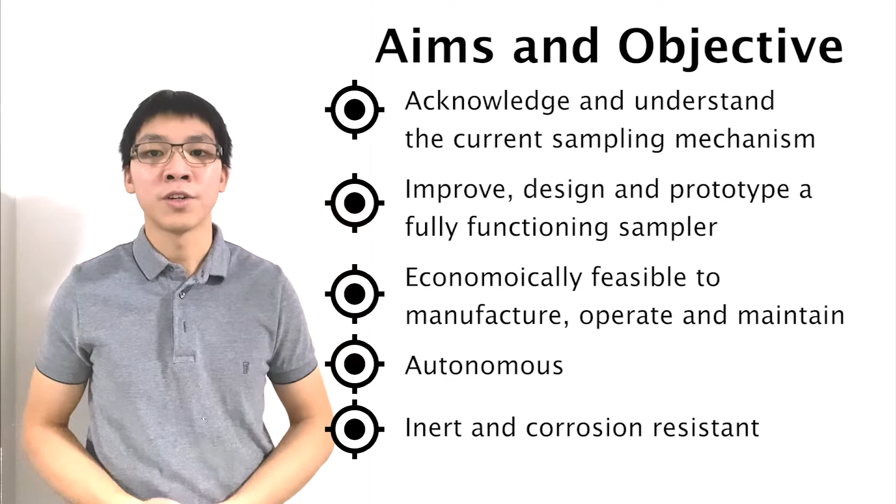Then improve, design and prototype a better version that is both autonomous and economically feasible to be deployed to a developing country. The system has to be simple, robust and reliable with the use of proper material that will not leach or react with chemical compositions or analytes found in water. In order to achieve this, a design flowchart was made. This acts as a systematic guide for the entire project while being able to identify key design phases.

The selection process undergoes the same methodological process in which the best and most suited design will be selected. The selection process includes the use of quality function deployment, Pugh matrix, system comparison, and cost comparison. Cost is particularly important in this design project as the system will be required to be deployed to a developing country. As such, a simple cost comparison was made for the different designs based on its manufacturing cost, operating cost, maintenance costs, and replacement costs.

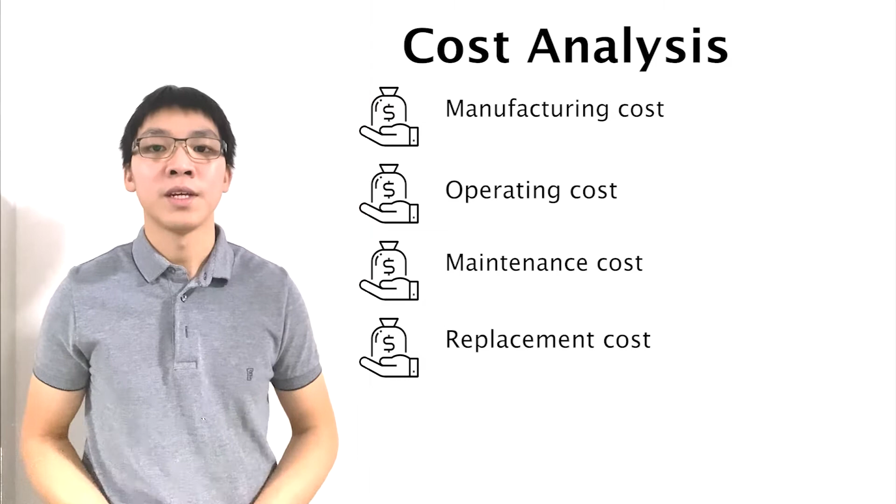The operating cost takes into account the local labor cost for the entire duration of sampling. Adding to that, a 5-year cost analysis was also done to compare its deployment feasibility. A total of 3 design concepts were made. The first design, as seen on the left, is an improved version of the reusable double check valve bailer, and a second design on the right uses a pump.

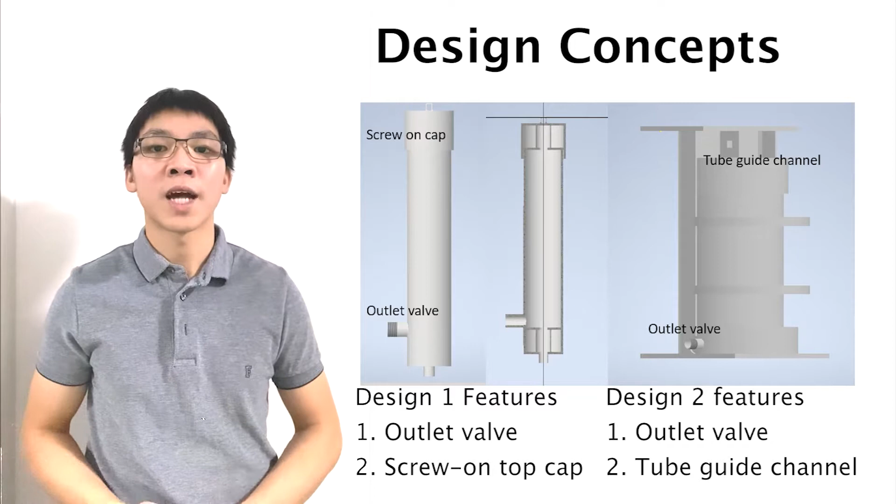Design 1 also has a screw-on top cap that allows the bottle to be accessed easily for cleaning and decontamination. Design 2, on the other hand, features a tube guide channel that acts as a support and guide for the inlet tube to feed water directly into the inlet of the bottle without coming in contact with it.

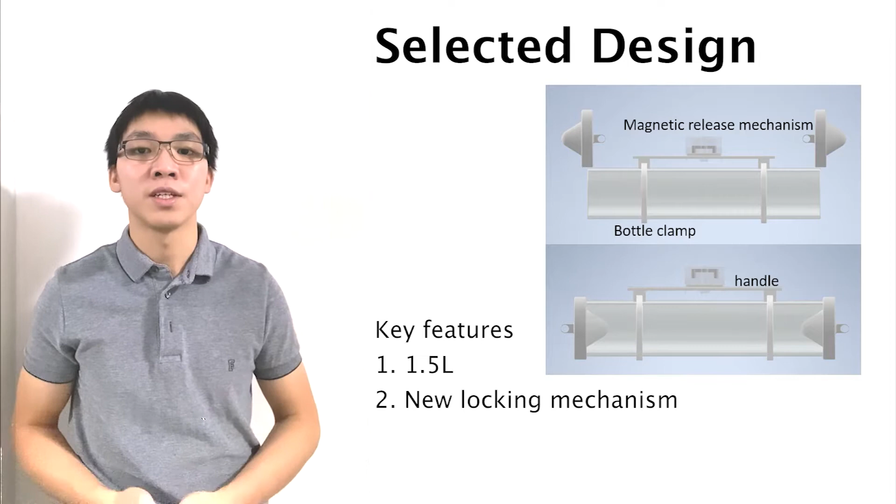The final and selected design is an improved version of the Van Dorn bottle with 1.5 litre capacity. This design features a newly designed closing mechanism that uses a magnet instead of the traditional messenger. This ensures that the triggering of the locking pin is almost certain every single time regardless of how deep the sampling is. Besides, it also has a detachable bottle clamp that allows different bottles to be used for different sampling conditions

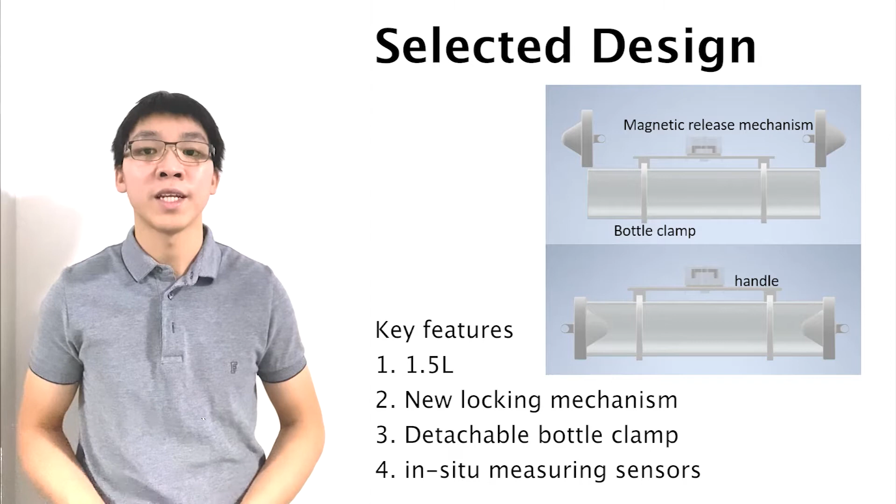and environments. The free space beneath the handle can be used to attach in situ measuring sensors. This includes pressure and temperature sensors. This is a particularly important feature for sampling in the Yamuna River as the pressure sensor will be able to distinguish between the foam and water layer. On top of that, the use of these in situ measuring sensors allows for different stratified layers to be identified. Here's a short animation of how the bottle will work.

Several tests were conducted on the final prototype. This includes a sampling volume test and a leak test. The purpose of the sampling volume test is to understand the sampling limit of the bottle when being submerged in water. It is particularly important that the bottle is filled completely with very minimal gas pockets as they tend to expand when being retrieved. This will affect the sample content.

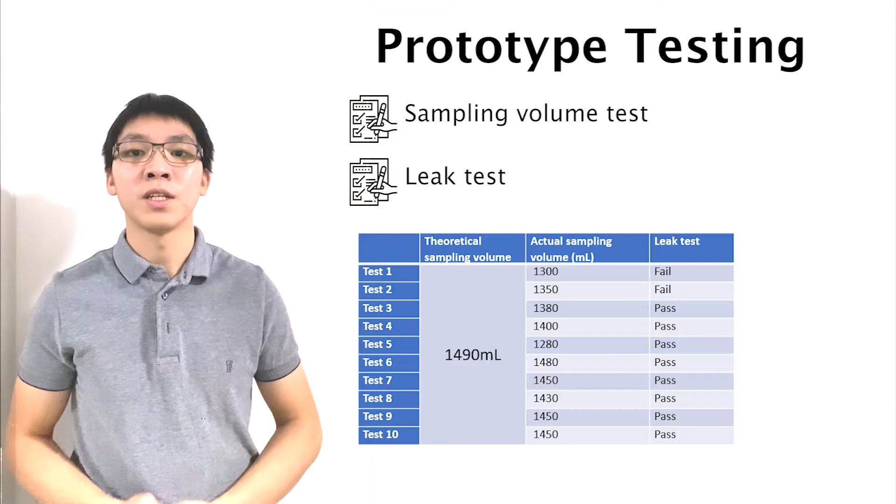The purpose of the leak test is to ensure that the bottle provides a relatively tight seal when sampling. As summarized here, the first 2 leak tests failed because of the latex tubing in the middle of the bottle. Through this test, the process of prototyping can be said to be a success where the bottle is able to perform its necessary tasks.

However, further testing is still required where the bottle will be put under adverse weather and water conditions to allow the operator to fully understand the capabilities of this design. Besides, several improvements can also be made on off-the-shelf components to increase its operational lifetime, to minimize replacement and maintenance. Before I end, how is this autonomous and how will it move?

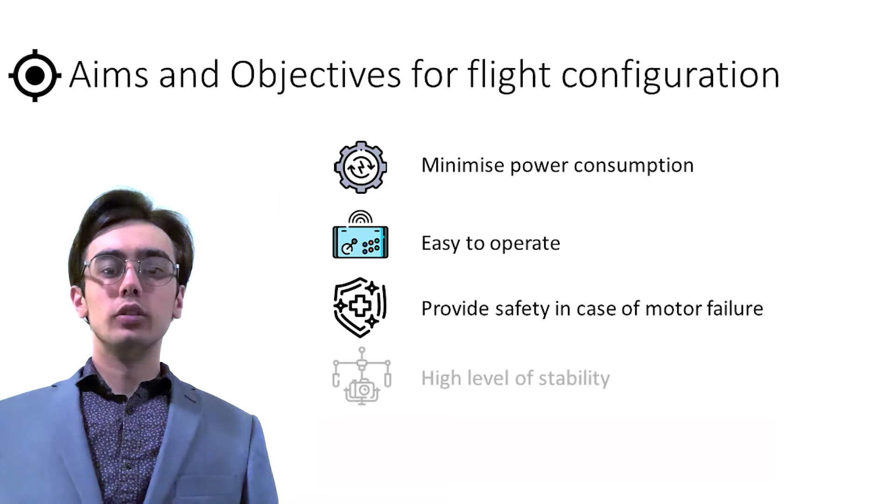It is clear to modify our drone to have a water sampling device attached underneath. It would need to accommodate a moderate payload capacity and possess a high level of stability to facilitate the sampling of water. The drone's flight system would also need to be carefully implemented to allow for a medium flight time, as well as include several safety features to protect the drone and drone operators.

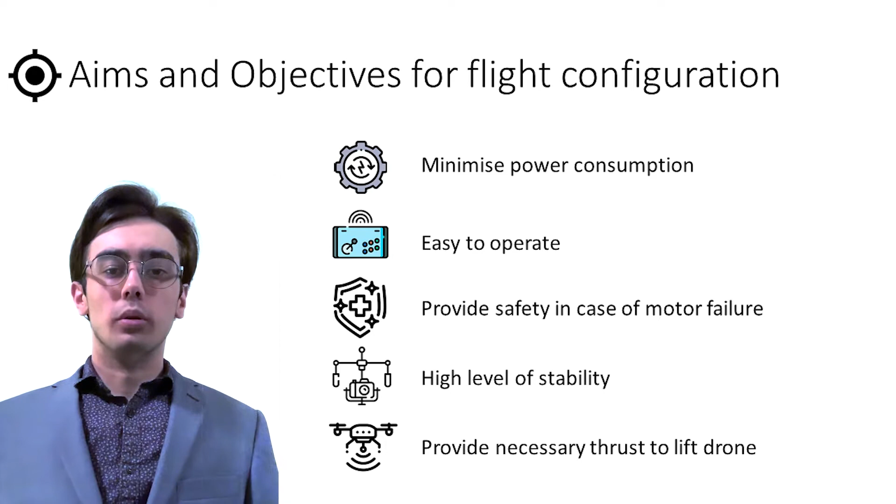Using a simple and concise design methodology, a suitable solution was developed which could successfully provide the necessary lift required to comfortably fly the drone, whilst maintaining a high degree of precision and safety. This was done using common design methods such as a quality function deployment and a Pugh matrix. These tools helped accurately translate the customer requirements into relevant technical specifications, as well as ensure the final design could effectively fulfill them.

The first design concept put forward was a quad-rotor drone. This multi-rotor drone exhibits high levels of stability and is easy to operate and maneuver. More importantly, the rotor configuration is able to use its multiple rotors to help reduce the risk of the drone being damaged in case one of its motors was to malfunction whilst in the air. However, this drone configuration suffers from low efficiency due to the increased power needs from the multiple rotors. To become a viable option, this design would need to minimize power consumption to prolong flight time.

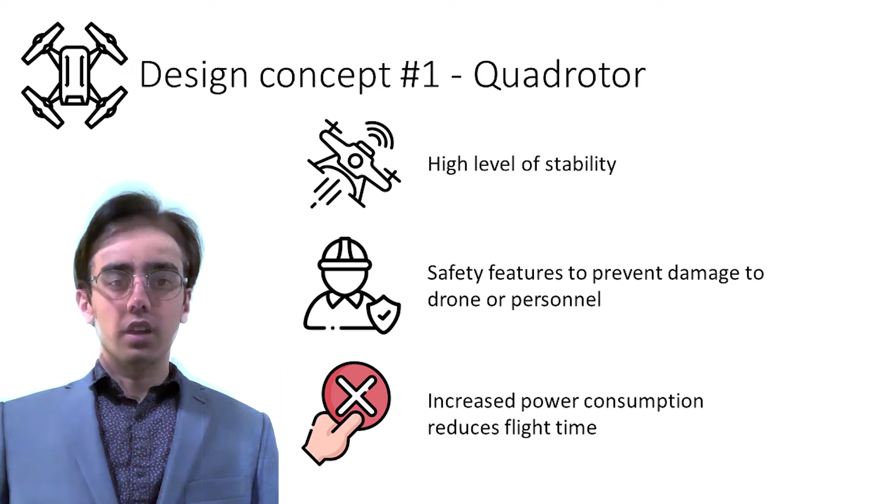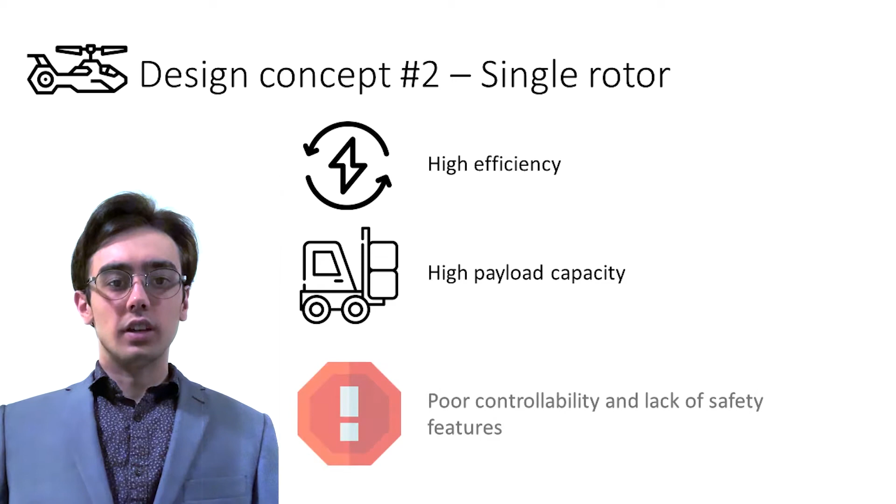The second design concept was a single rotor drone. This drone rotor configuration is very efficient, which allows it to carry high payload capacities for extended periods of time. By only using a single rotor, the length of the propeller blade can be easily adjusted to increase the amount of lift produced. Unfortunately, this drone design is difficult to operate and lacks the backup rotors that multi-rotor drones have. To integrate this design, this drone configuration would need to become easier to control and be modified to include safety features to protect the drone from external damage.

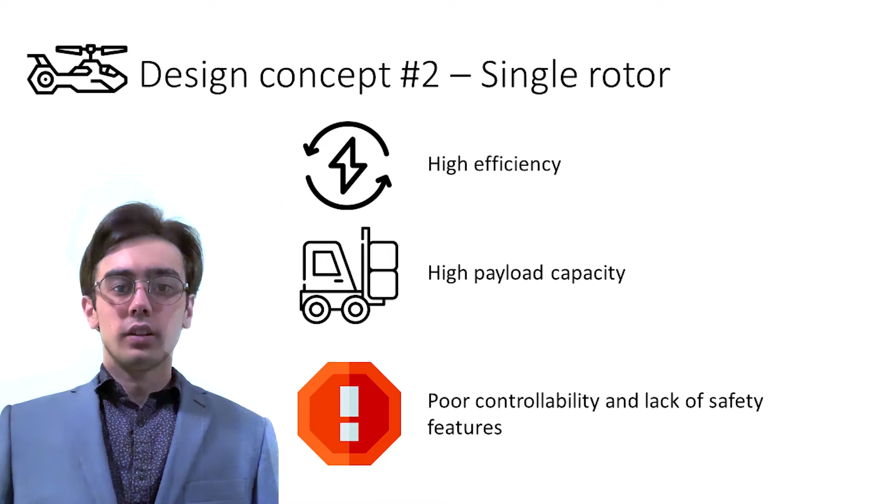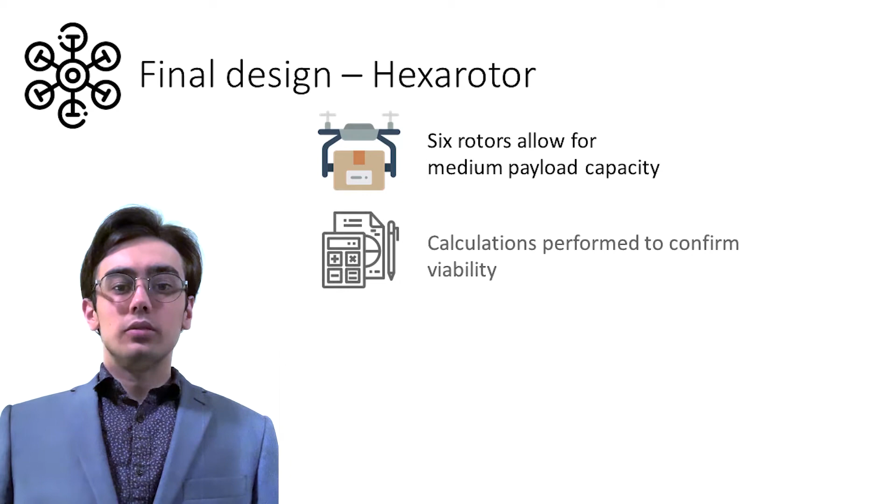The final design selected for the flight system of the drone was a hexarotor configuration. This multi-rotor drone is able to meet the medium payload capacity required by using an additional 2 rotors. Furthermore, this multi-rotor configuration benefits from the extra 2 rotors, which can be used to safely guide the drone down in case one of its rotors were to cease function mid-flight. To prove this design could indeed provide the necessary thrust to comfortably lift the drone, thrust calculations were performed.

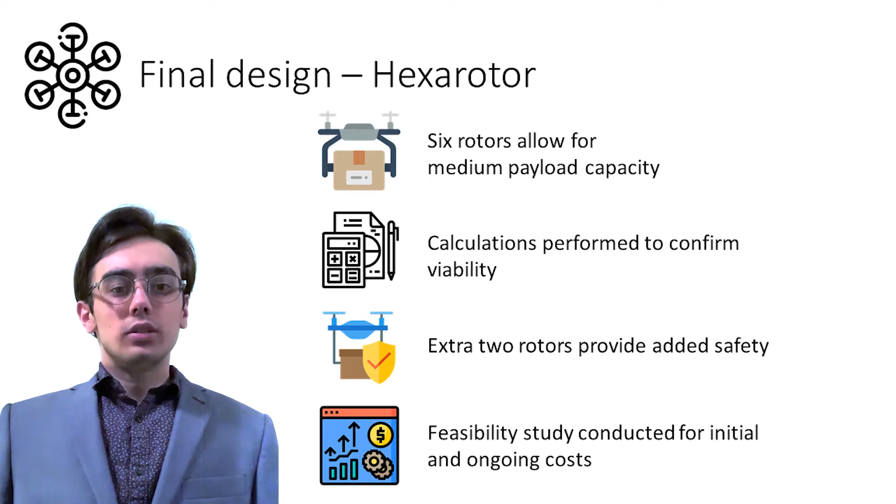Moreover, to further validate this design, a feasibility study was conducted to outline the initial and ongoing cost over a 5-year period. This hexarotor configuration was shown to be an optimal design solution for the purpose of sampling water using a medium payload capacity. To further improve this design, future recommendations were put forward, which included the addition of propeller guards to increase the protection and safety of the propeller blades.

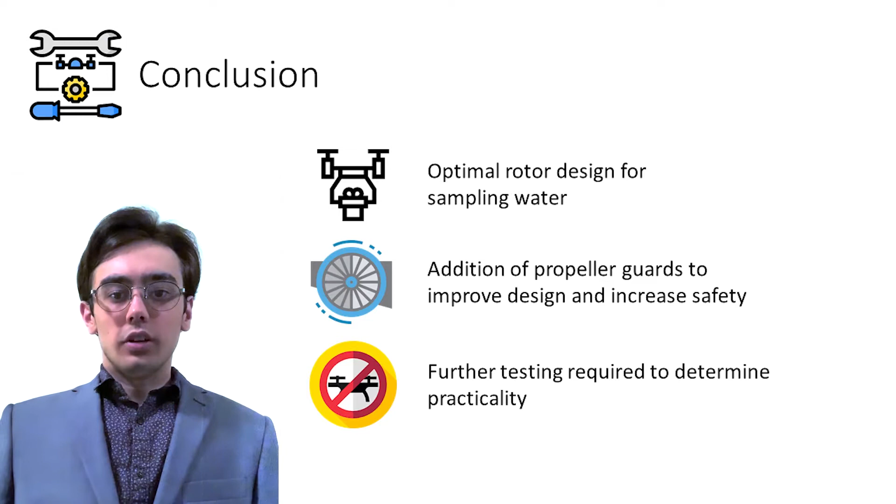Due to restrictions, future testing was also needed to confirm the practicality of this design in the field. Whilst this hexarotor drone configuration was proven to be a feasible design, the chassis would also need to be modified to allow this flight configuration to be fully integrated.

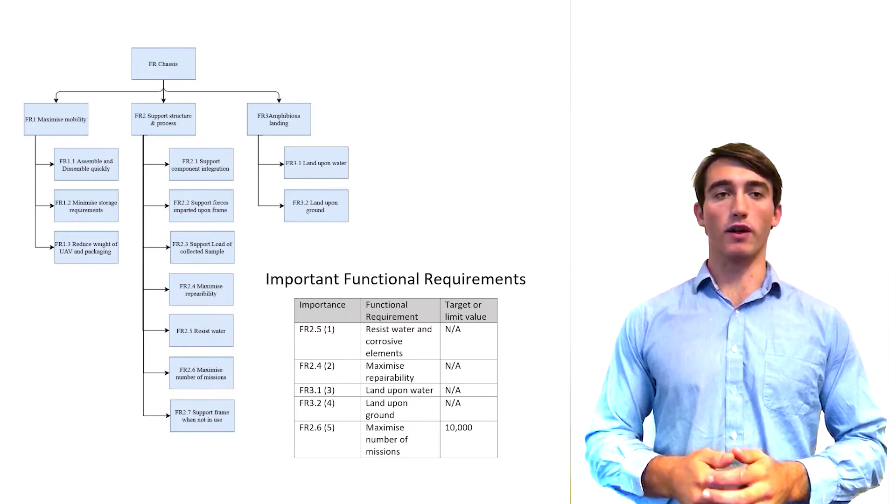Functional requirements relevant to chassis design were developed to optimize mobility, structural support, and amphibious capabilities, with a QFD analysis revealing additional consideration and weighting to be given to water and chemical resistance, repairability, durability, and ground and water landing requirements. Corresponding design parameters were then constructed to assist in the development of conceptual designs via a morphological matrix.

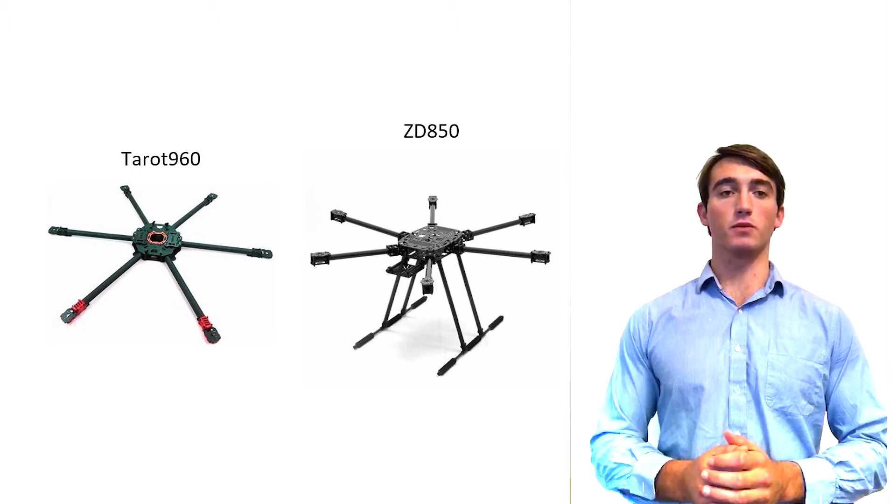Now, Thesis A identified that heavy lift, waterproof drone frames were not commercially available. However, it also revealed the modification of an existing off-the-shelf drone frame to be more feasible than a fully customized frame. As such, the Tarot 960 and ZD850 were identified to best reflect the design parameters of concepts 1 and 2, with a Pugh matrix revealing the ZD850 to best satisfy functional requirements and ease of modifiability.

Foldable propeller arms improve portability, high-strength carbon fibre members reduce weight without compromising structural performance, and a modular system supports repairability. The original ZD850 central housing plates comprise a range of slot and hole configurations to outfit different component integrations. However, the resulting porosity essentially precludes operation in proximity to water.

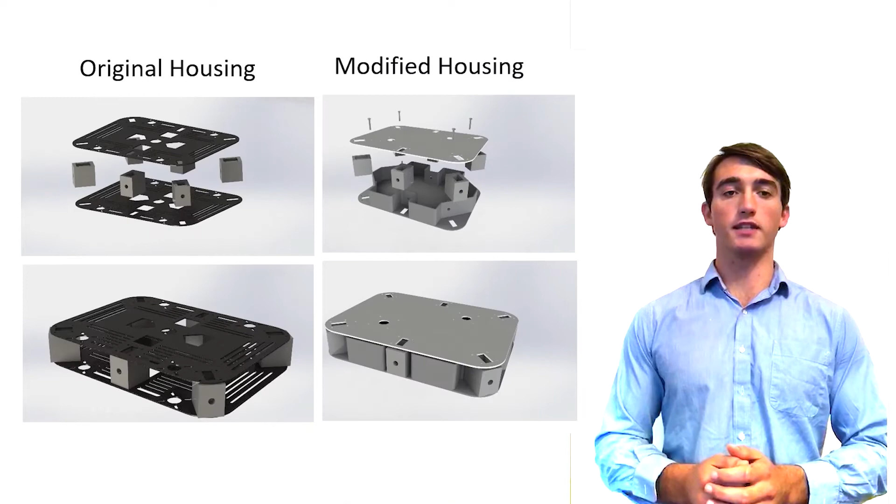A purpose-built drone such as this doesn't require these integration flexibilities, so a customised watertight central housing was constructed from ABS, with 4 reinforced screws added to ensure waterproofing and ease of access for inspection and repair. Weighing only 61 grams more than the original housing, this supports a feasible modification.

Component integration was also designed to align the drone's centre of mass with its geometric centre, thus improving flight stability, and holes were created allowing circuitry to access motors, navigational equipment, and batteries. Carbon fibre members were also sprayed with a UV and water-resistant coating to maximise durability.

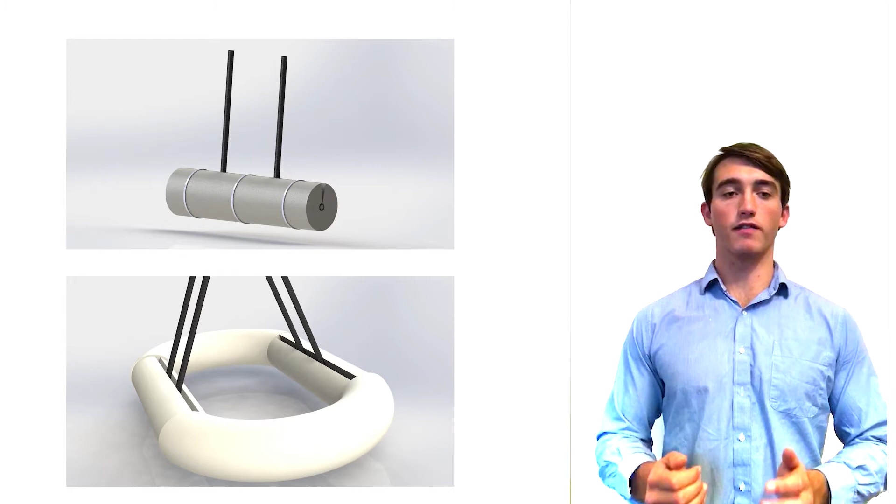Landing legs were outfitted with a closed-cell polyethylene pool noodle capable of providing the necessary flotation to support an additional 4 kilograms more than the expected maximum payload, acting to conserve battery power while sampling and prevent loss over deep water bodies in the event of critical failure.

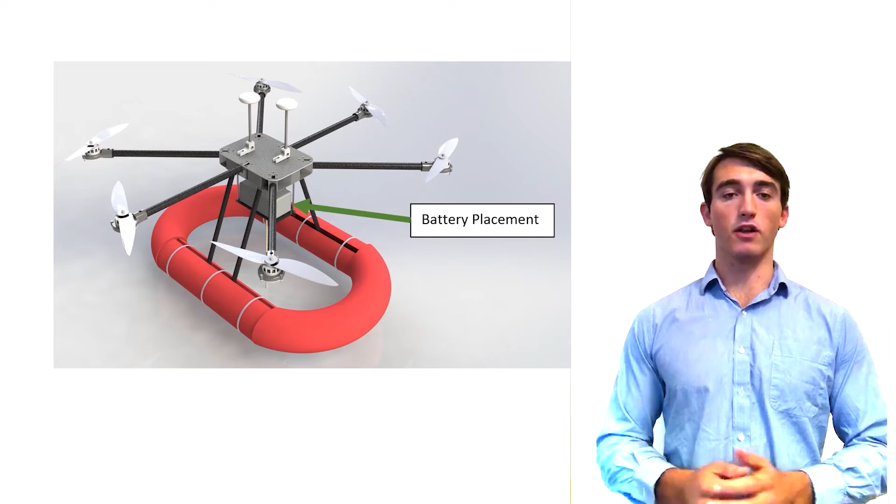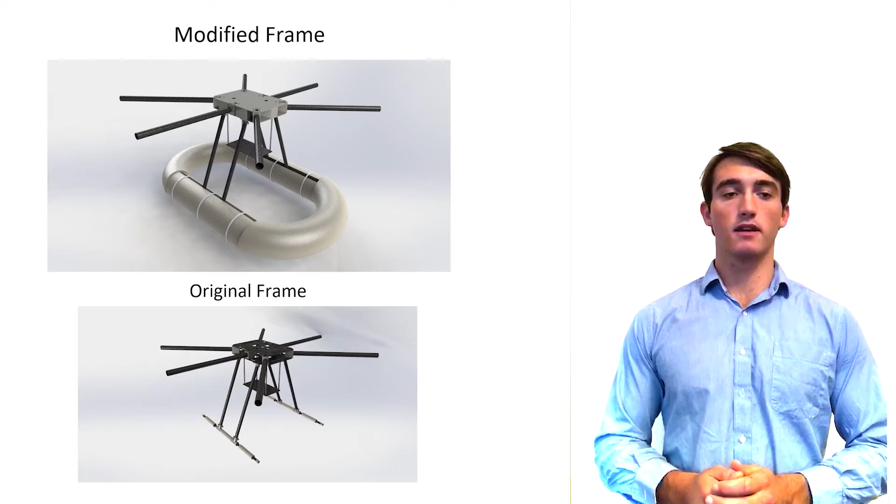The battery was placed upon the bottom rack to lower the centre of gravity from 17 centimetres to 12.5 centimetres above the ground, thus improving stability upon floating. The redesigned ZD850 shown here weighs only 1.25 kilograms and can support an 8 kilogram payload, meaning it is more than capable of carrying the required mass. I will now pass it over to Alex to talk about flight control and planning.

Thank you, Henry. So in my section, I'll be going through 3 of the many hardware and electrical components that will help this whole drone work. The aims in my section were to find a method of manual control, to select the optimal control algorithm for flight stability and maneuverability, to develop a path planning algorithm for optimal trajectory, as well as finding an effective processing unit to process multiple algorithms.

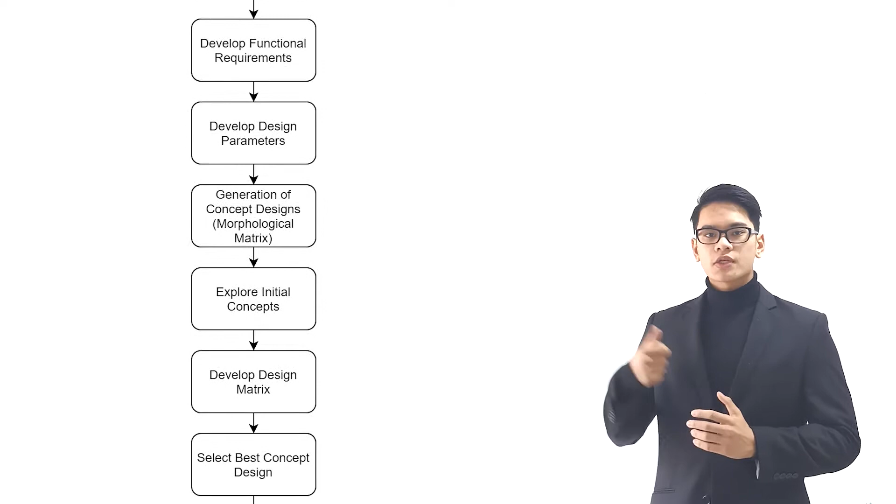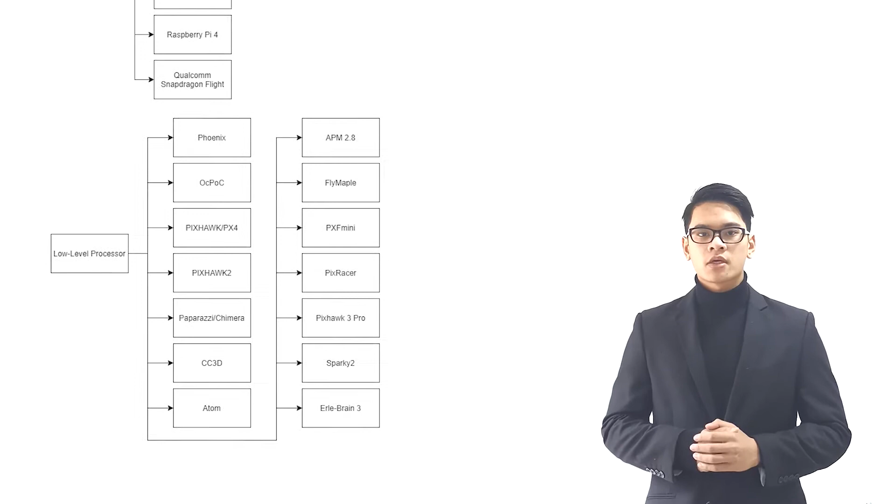So it all starts with the design methodology, where following this framework will ensure my final design is adequate. These are the multiple design parameters that I found, and they all went into a morphological matrix where 3 initial designs were made. So let's get into these concepts.

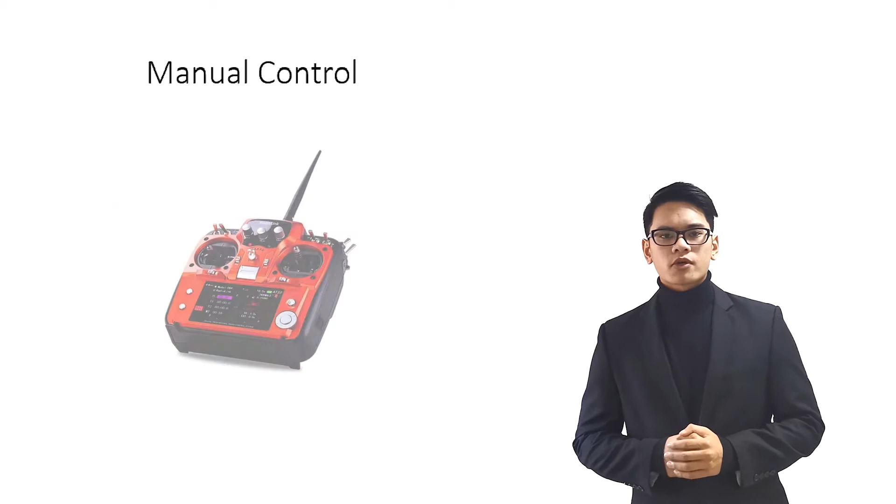In terms of manual control, the smartphone app has become increasingly popular, where you only need one device for live video broadcast as well as manual control, and it's definitely amazing to incorporate within a product. However, personally developing an application this early in the stages of development does not seem feasible, so a remote control is recommended. For flight control, the algorithm isn't the only component for stabilization.

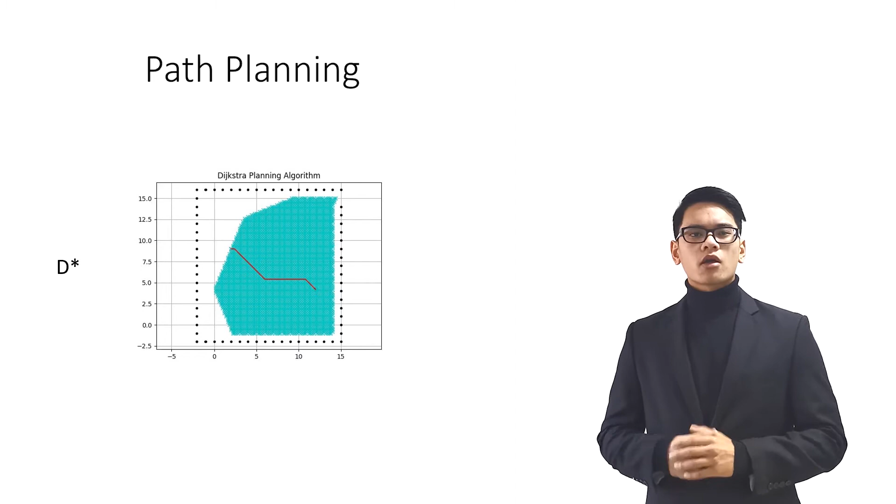It's the complex synergy between peripherals. So developing from scratch seems very hard, and purchasing may seem more feasible as they're currently very mature and have been developed over a decade. So 3 path planning algorithms were placed in the same experimental environment, where the D-Star provided an adequate path but a long processing time. The PRM had the same processing time, however, a more optimal path, and the RRT method had a shorter processing time with an adequate result.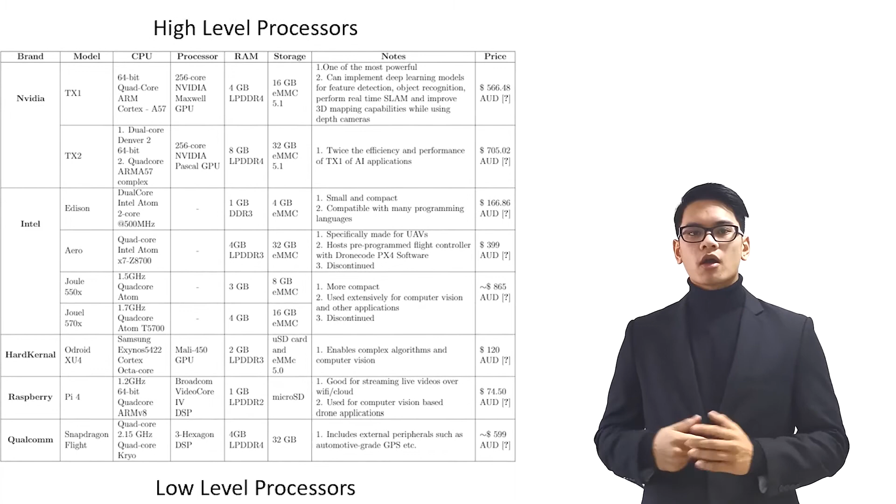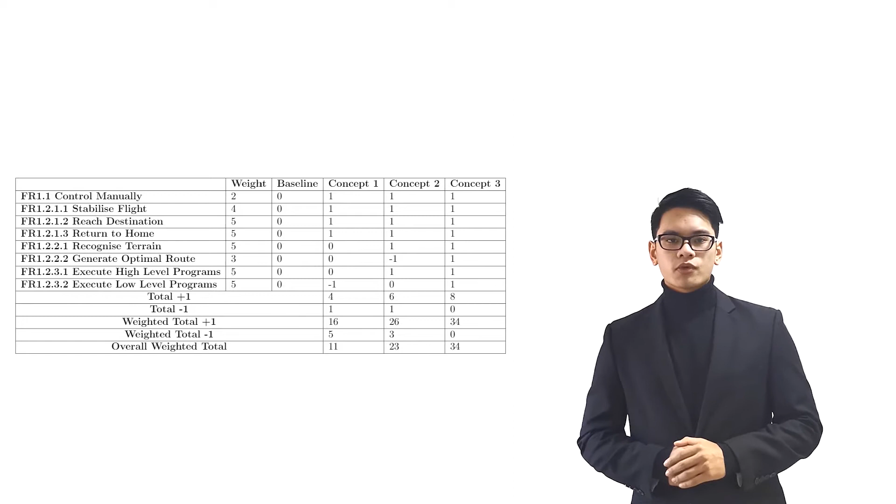The feature cost comparison was made between the high and low level processing units and considered for the final selection. And the concepts and the FRs were compared together through a Pugh matrix, where overall the 3rd concept was decided, which was the use of a Pixhawk 4, a Raspberry Pi 4, a remote control, and the RRT method. So let's get into the final validation of the RRT method.

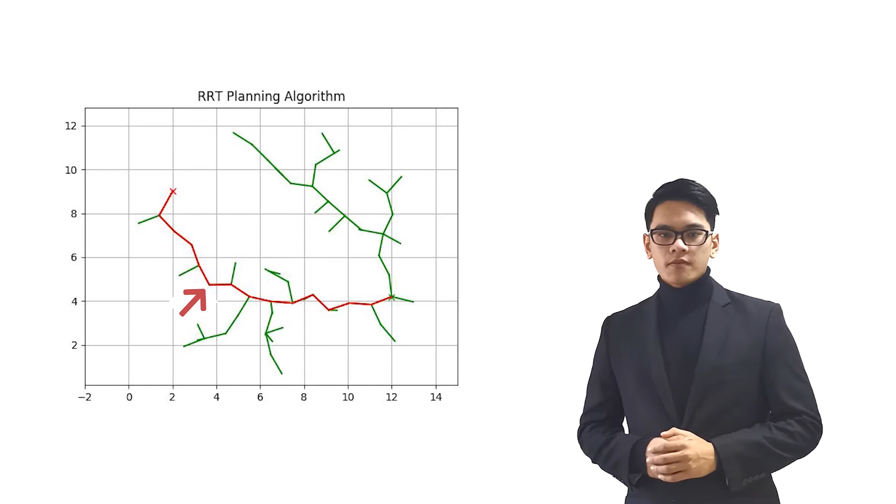To validate this path planner, it was tested with 2 satellite images, and these satellite images were placed into a virtual environment, the green being the starting point and the red being the sampling point. There's no obstacles in this image. So the red path generated, you can see it's very jagged, and it would waste a lot of battery life if the drone was to fly through this path.

So we developed a smoothing algorithm, which is in the blue, and it's almost a straight path, which is great for the battery. In the second mission, we incorporated obstacles, which are the trees on the right hand side of this image, and it was placed into an image processor, put back into the virtual environment, resulting in these blue obstacles.

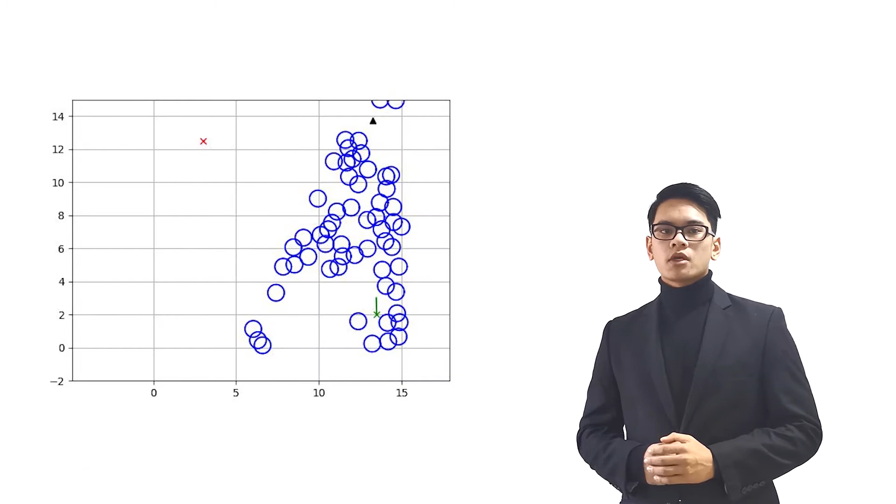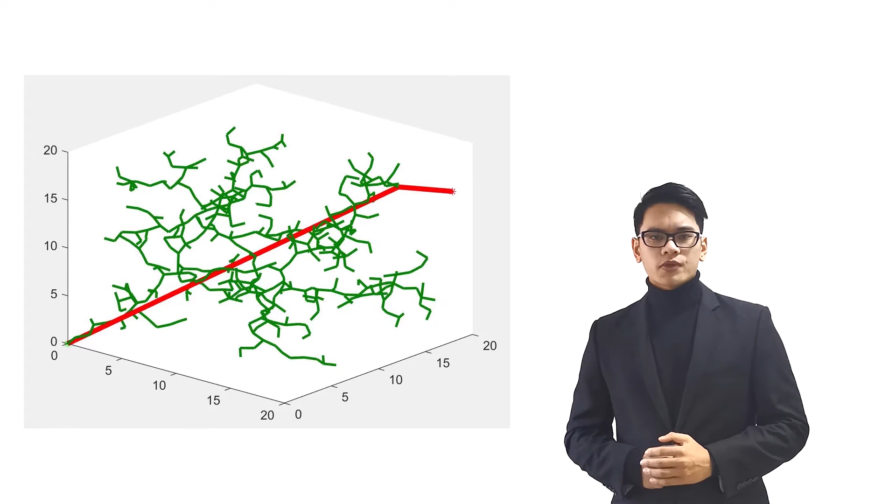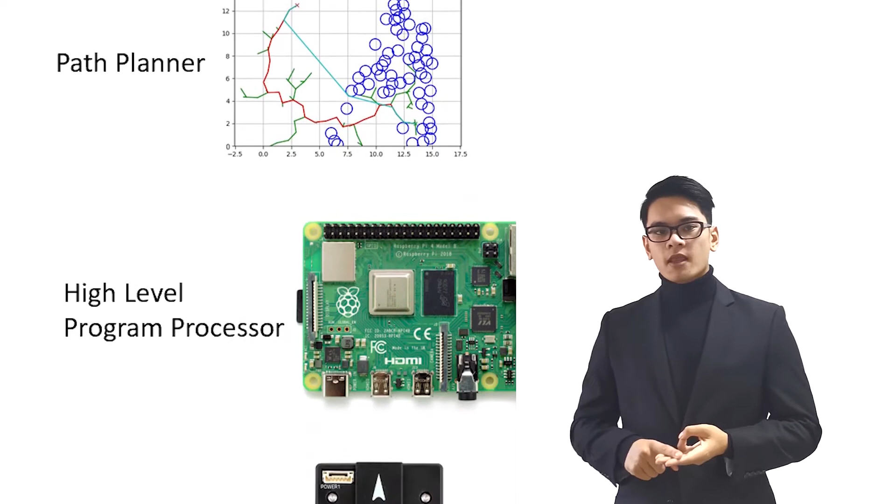And the path planner was made and produced a definite optimal result. So it was also placed into a 3D environment, however no object data could be incorporated due to time constraints. So to conclude, the radio remote control will be used as the manual controller, the PX4 system will be used as the flight control, the modified RRT method will be used as the path planner, and the Raspberry Pi 4 and the Pixhawk 4 are used to execute programs.

So you might ask now, how does it detect the objects? How does it even conduct the mission? Aaron will answer those questions within his section.

Drones are not smart. So far, we have tried our best to guide them with a safe path and hope they can come back. But obviously, this is not enough. As we're sampling along the Yamuna River, we may encounter buildings, people, and other unexpected obstacles. Before we can deploy our drone into public use, we have to address these risks.

Knowing this is an application for a developing country, we aim to develop an autonomous navigation system that is robust and reliable, where algorithms and sensors are tested under real-world scenarios. Operational, where minimum training is required for the safe operation of the system. Cost-effective, where local sensors and less complex algorithms should be selected. Transferable, where systems can be easily set up, deployed, and updated at scale. Weight efficient, where less bulky or heavy hardware is prioritized in selections.

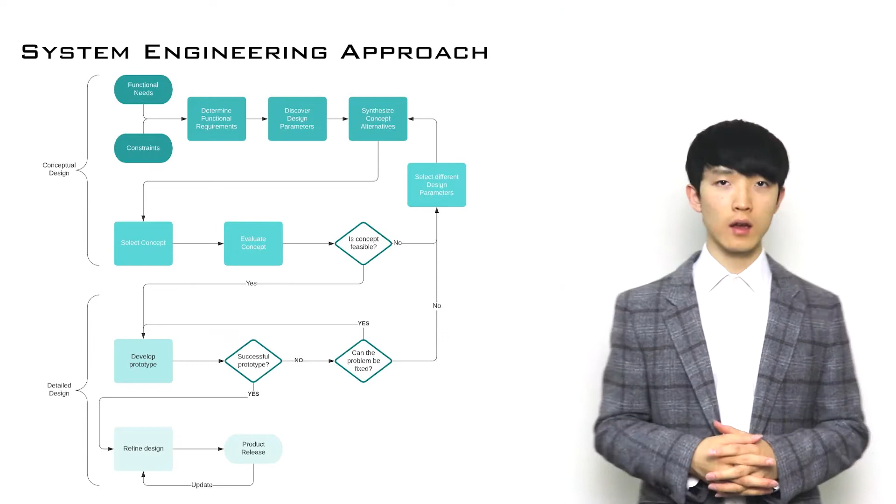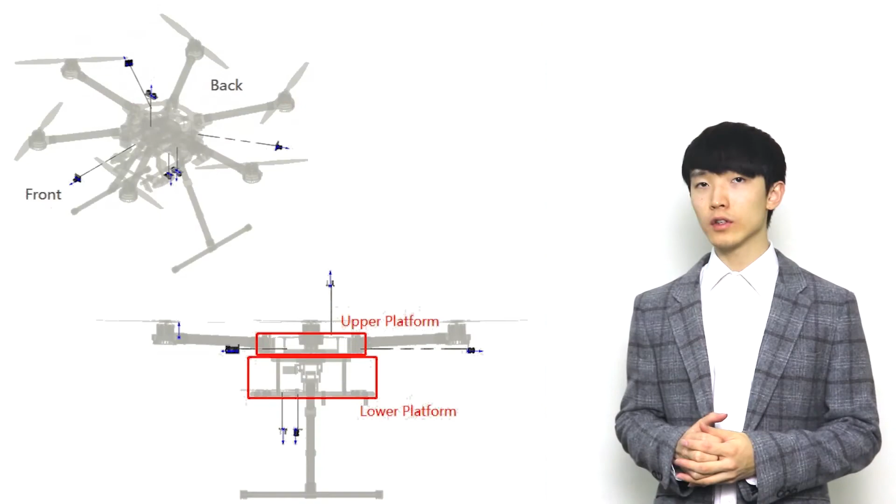We propose a methodology based on a system engineering design approach, which primarily consists of a conceptual design stage and a detailed design stage. In the first stage, we conceptualize our design by determining the functional requirements, finding the corresponding design parameters, combining the components into alternative design concepts, and finally finding the optimal design. Based on the design concepts, 4 subsystems were prototyped and evaluated during the detailed design stage. This includes a finite state machine-based mission planner, a monocular vision-based sensor configuration, an obstacle avoidance algorithm, and a tracking algorithm for safe landing. Let's demonstrate our result with an example.

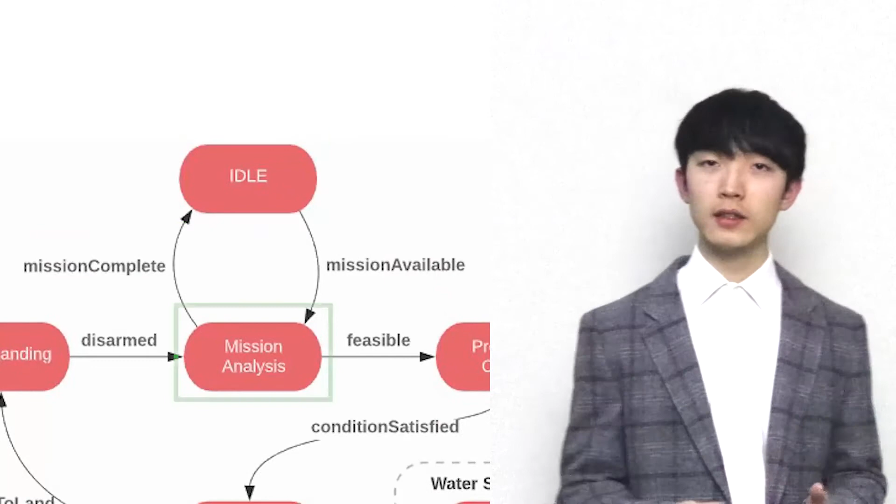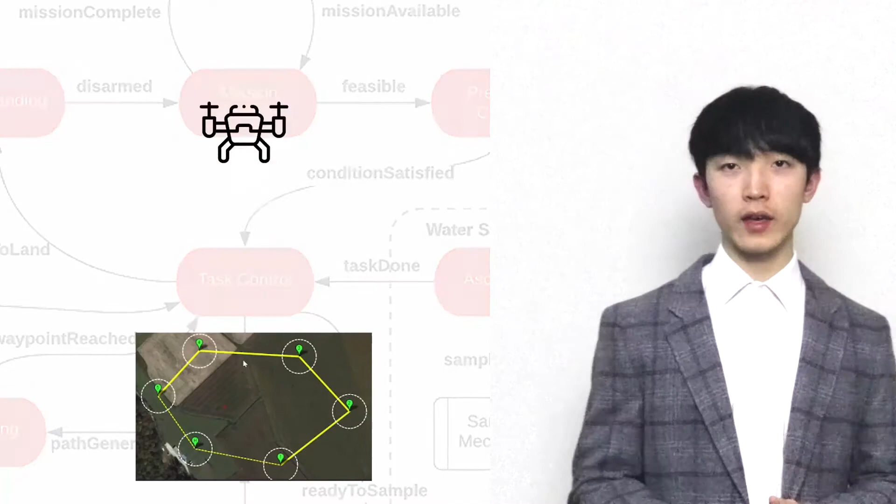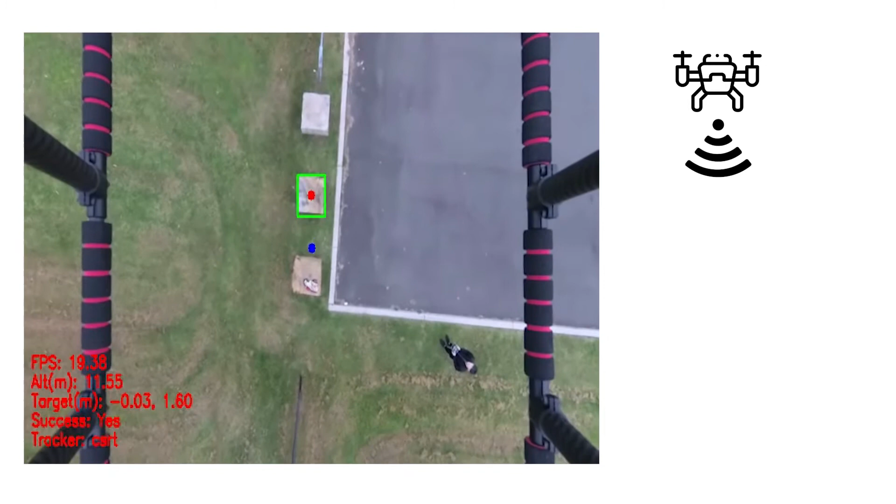In typical water sampling missions, the autonomous system starts with a mission planner where the high-level behaviors are managed using the finite state machine. When the mission starts, the planner system will invoke a series of checks and analysis before the drone takes off. Once the drone is ready, it enters the central task control state where it kickstarts path planning and begins navigating. During the flight, the system continues to avoid obstacles through an optical flow algorithm. When the vehicle returns to landing, the downward-looking camera is triggered and the tracking algorithm finally guides the vehicle to a precise and safe landing.

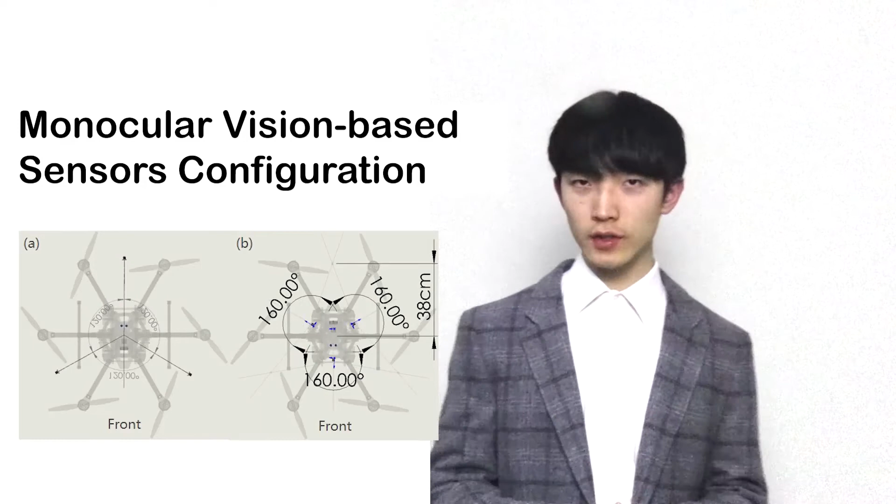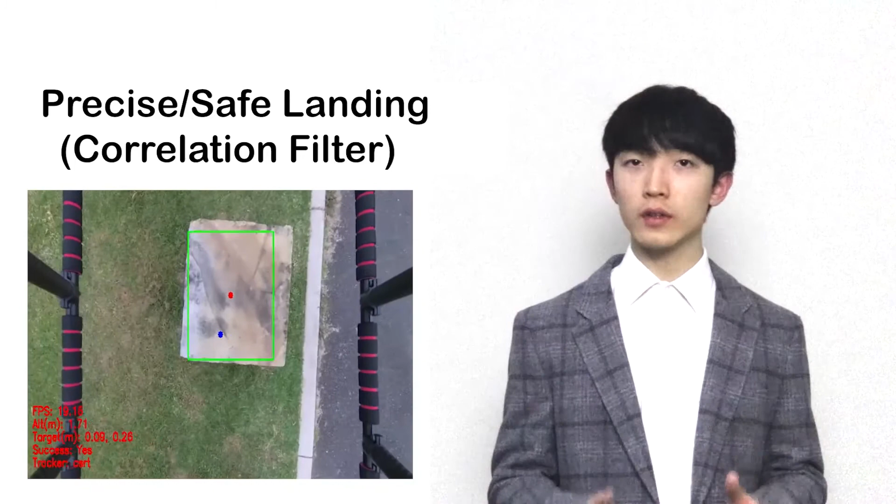To conclude, we developed a finite state machine-based mission planner to handle a variety of situations during a multi-stage water sampling mission. A monocular vision-based sensor configuration that facilitates near-water altitude measurements and full coverage in field of view. An obstacle avoidance algorithm to detect and avoid obstacles in a critical range of the vehicle. And a tracking algorithm to check the landing site and guide the vehicle for a safe and precise landing. The entire system costs $200 Australian in hardware, but runs at 18 Hz in control frequency. As a result, a simple, robust, yet cost-effective navigation system was developed.

Now we have the ability to automate the systems. There's another essential component for keeping all this electronics alive throughout the mission. Here, we'll have Anthony talk about our power system.

Thank you, Aaron. In the power and prognostics portfolio, I addressed a few things. What is the power source? How will it be diagnosed? And how long will it last during missions? The methodology firstly undertakes a selection criteria of components for power and power management devices. This sets the foundational work for software to be implemented on. Then, we compare various machine learning methods. Finally, implementing the modeled, trained, and evaluated machine learner into an application on the drone.

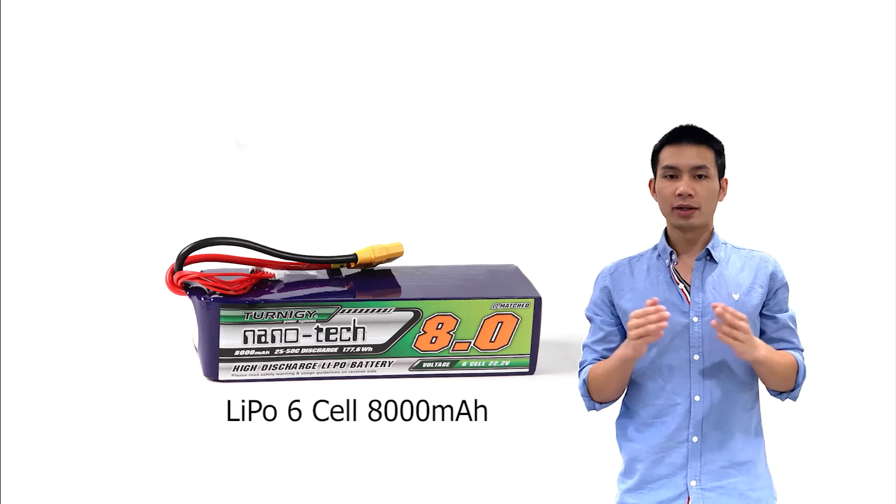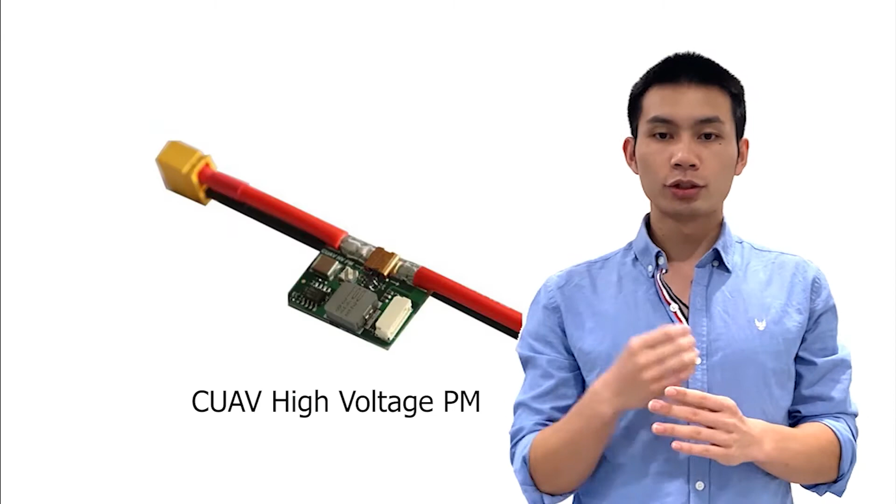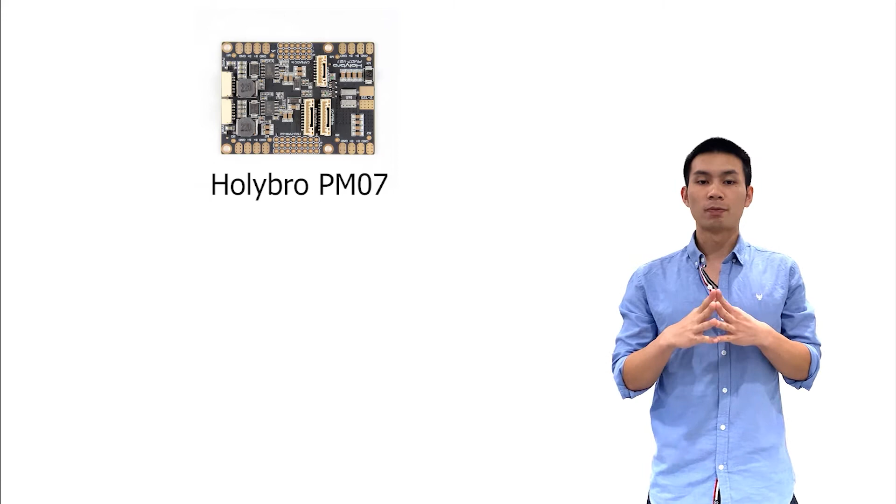The power source is compared across 3 types: solar photovoltaic, hydrogen fuel cells, and lithium polymer batteries. We've selected the lithium polymer battery, which is independent of the weather and can be maintained in our chosen location. Then, 3 power management boards were used for justification: the Mauch Power Cube, CUAV HV PM, and the Holybro PM07. The decided selection was the PM07, as it provided power fault redundancy, senses multiple readings such as voltage and current, and was the most economically affordable at $66, which is the lowest of the cost options.

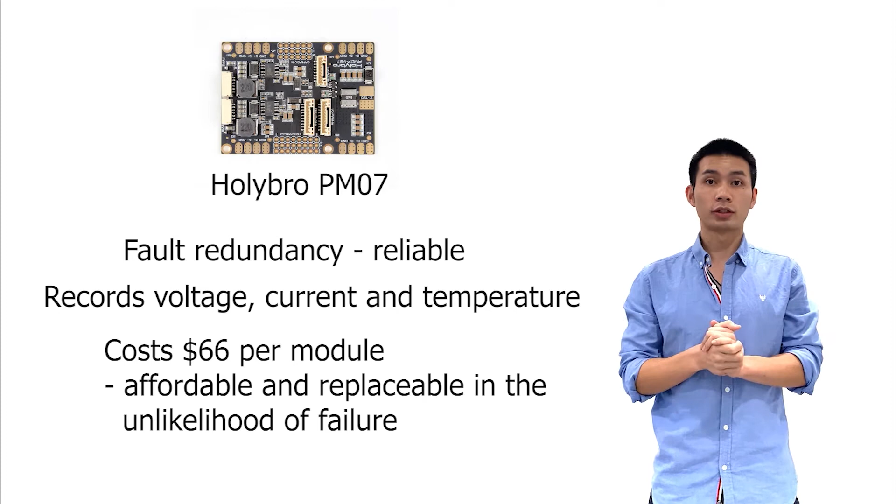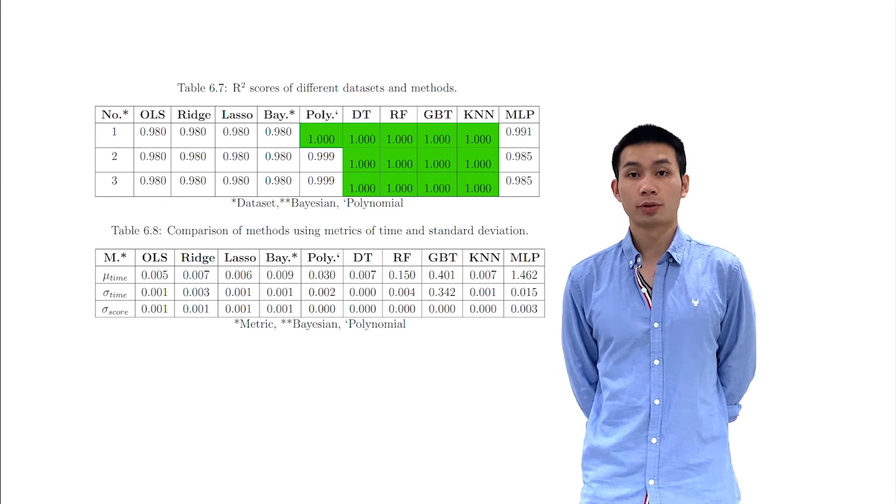Finally, for the prognostics, 10 different machine learning methods were built, modeled, and evaluated. For predicting remaining useful life, I've compared each against its accuracy and computational resources required to justify an appropriate solution. The final justification is the decision tree regression, needing only 0.007 seconds to train and with an accuracy of almost 100%.

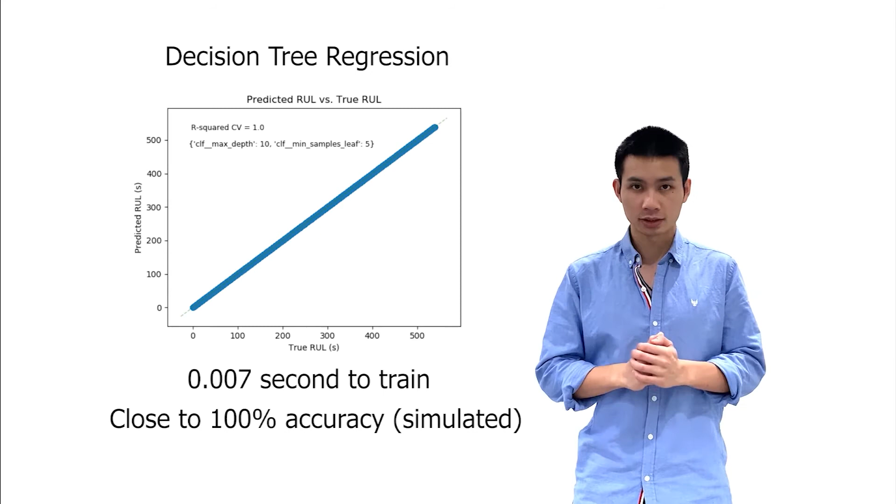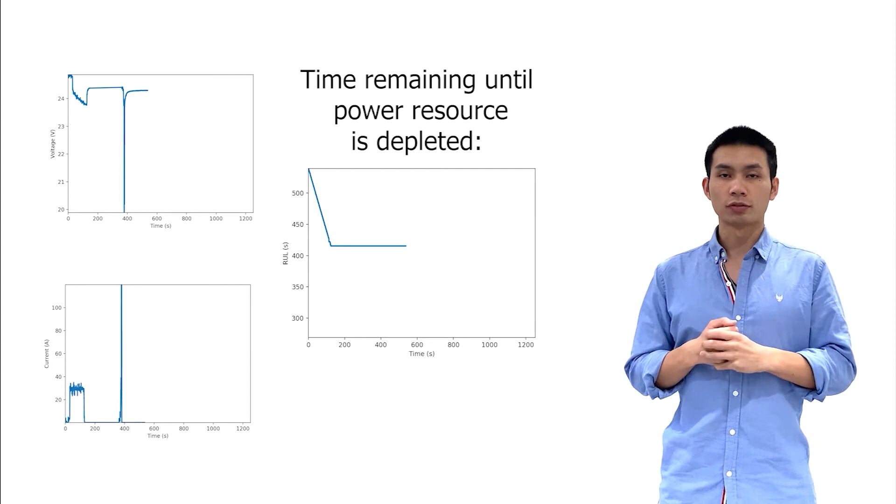Here is a live stream of how the battery is monitored with voltage and current, as the decision tree also predicts the remaining useful life of the battery during the flight. All these design considerations are housed in a software architecture as a preemptive method to safeguard the user from damaging the battery, preventing over-maintenance and sustaining the uses of the drone.

But how does it all communicate? We have Dylan next to explain the communication system.

Thanks, Anthony. The aims and objective of the communication component is to create a robust communication structure to be used by the UAV. The methodology for design is to first determine the requirements needed for the communication system. After that, the radios will be selected and the material will be chosen to house the components. The second part of the design is to optimize it for range.

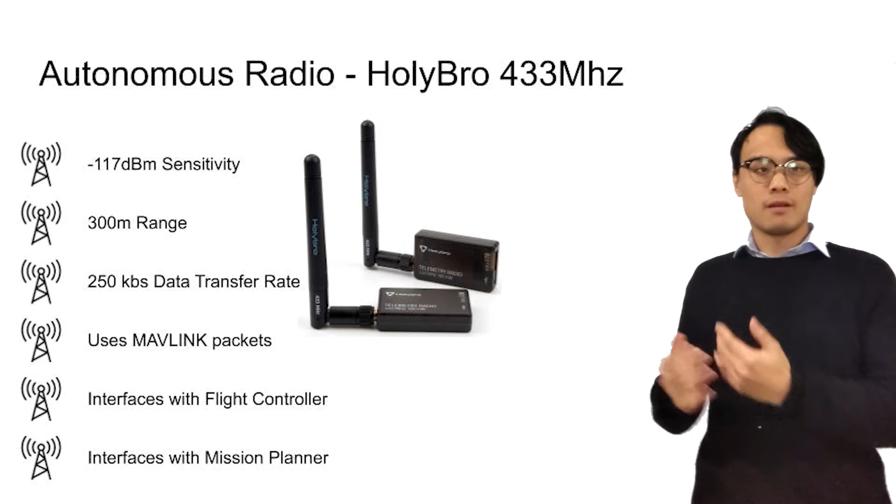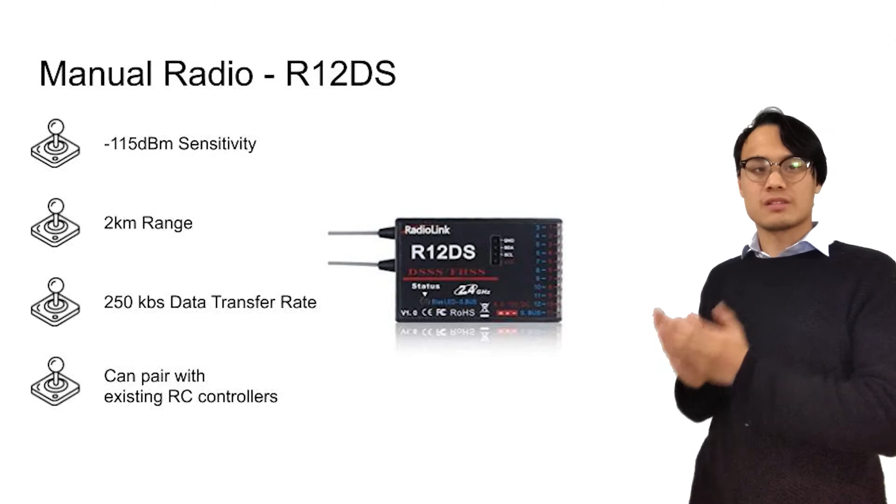The autonomous radio selected is the Holybro transceiver. This radio was selected as an interface with the flight controller system, as well as it uses MAVLink protocols, which is used by the mission planner. For the manual radio, the R12DS radio was selected. This radio met all the required performance parameters. The deciding factor for this radio was that it has an inbuilt pairing system which allowed it to be used with existing RC controllers.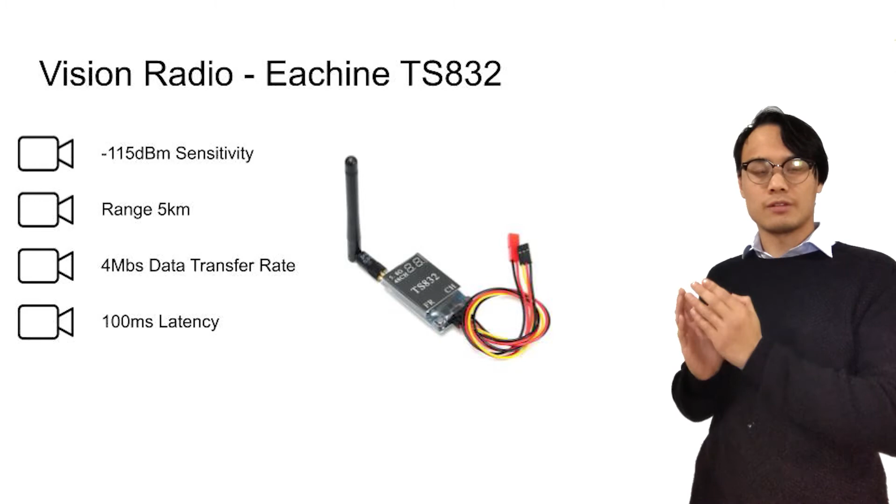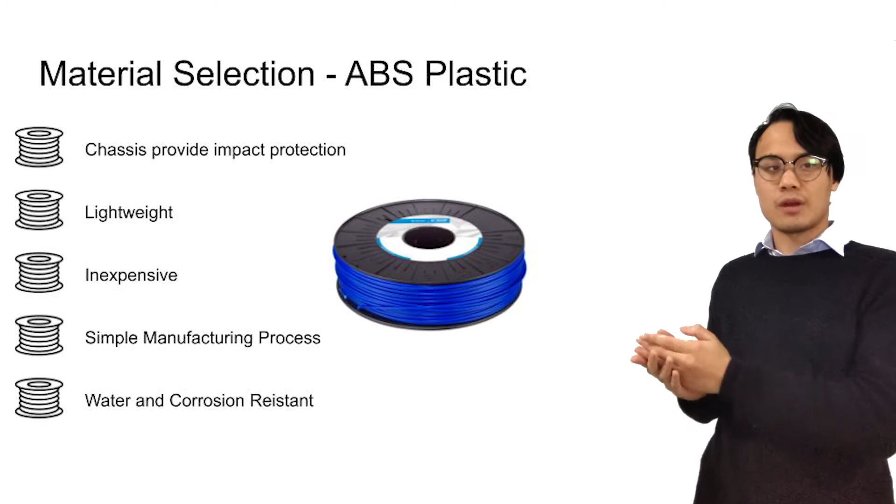The vision radio selected is the TS832. The range and data transfer of this radio far exceeded what was expected. The low latency of this system also allows for seamless video stream. Next, the material will be selected for the housing, with a focus on water resilience. ABS was selected because it is lightweight, water resilient, and very easy to work with. The final design of the housing can be seen here.

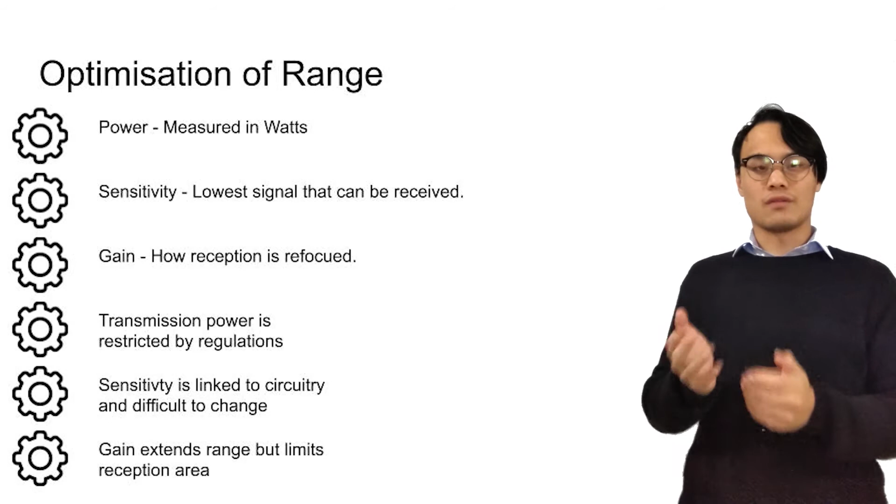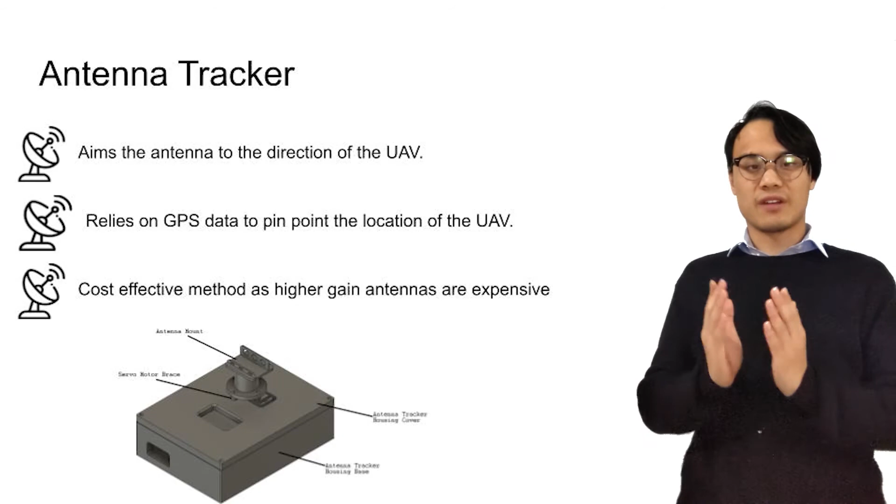The parameters that affect the range of the transmission include the power of the transmission, the sensitivity of the radios, as well as the gain of the antenna. The only feasible parameter that could be changed from this list is the gain. However, increasing the gain would decrease the reception area of the antenna. A workaround of this is the antenna tracker. The antenna tracker processes GPS data and repositions the antenna so that it's constantly facing the UAV. This is a cost-effective method of maximizing range.

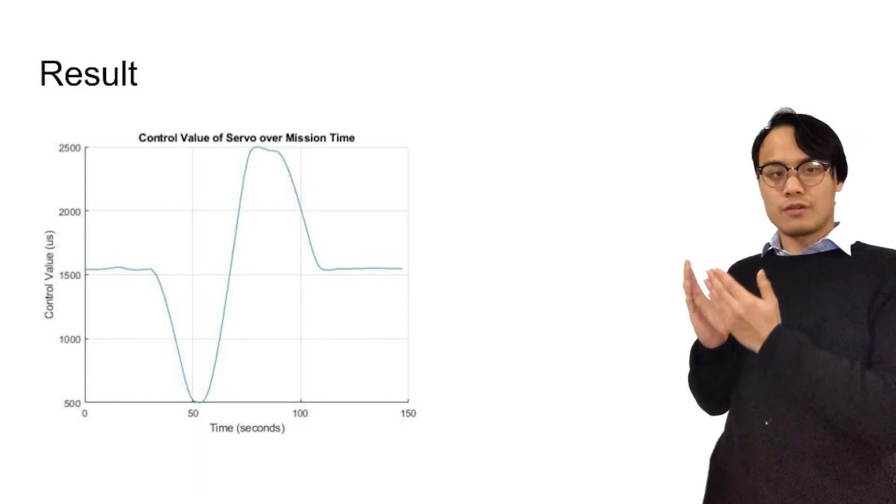A simulated test flight was conducted where the UAV flew in a triangular path. The GPS data was then collected and passed into the control algorithm. This was a generated control signal over the mission time. The control value is sinusoidal, which reflects how the UAV moved during the mission. This validates the control algorithm developed for the tracker.

Some future work for this project would be physically manufacturing the components to test the strength and water resilience of them, as well as testing the range capabilities of the antenna tracker with the radios. I would like to present the complete integration of all our parts.

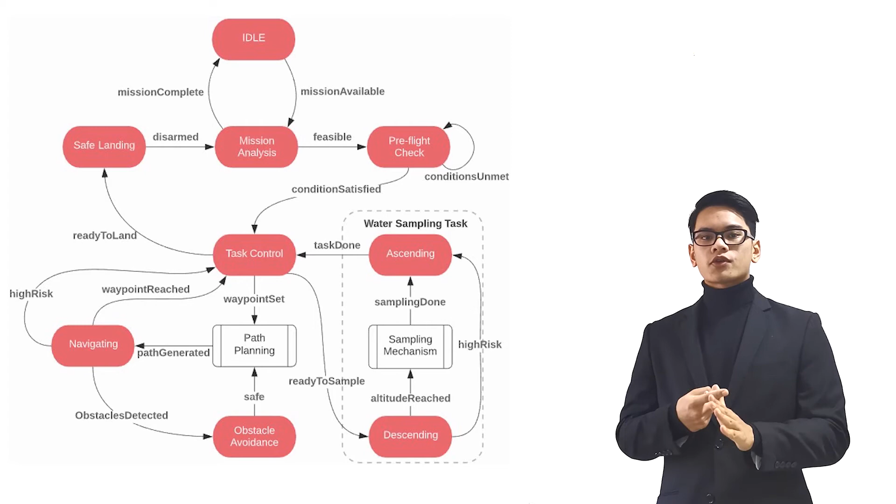The implementation of a finite state mission planner allows for the automation of this whole system, where we use the Raspberry Pi 4 that allows for the synergy of camera, sensor, path planner, power module, flight control, and radio data for mission completion.

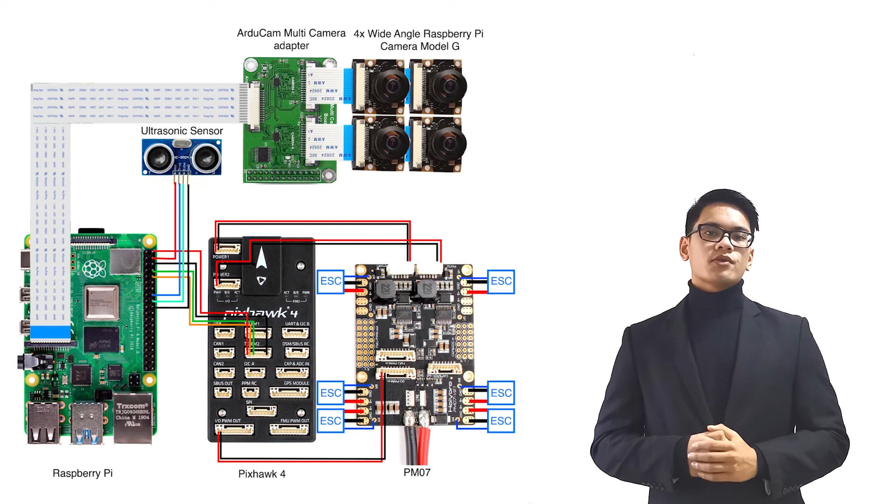Furthermore, as Dylan mentioned before, the antenna tracker was incorporated at the ground control that tracks the GPS coordinates of the drone to overall increase the signal strength. Now you might wonder, how much does this all cost? And is this a waste of money compared to the current water sampling methods around right now? Brandon will continue with his section, where he conducts a feasibility analysis.

To understand the feasibility of this solution, the manual sampling method will be used as a reference. The initial and ongoing costs of both methods will be broken down and analysed. The initial cost of the autonomous solution involved several components such as the power of the drone, the sampling system, communication, chassis of drone, flight control and path planning, navigation and mission control, and rotor and aerodynamics.

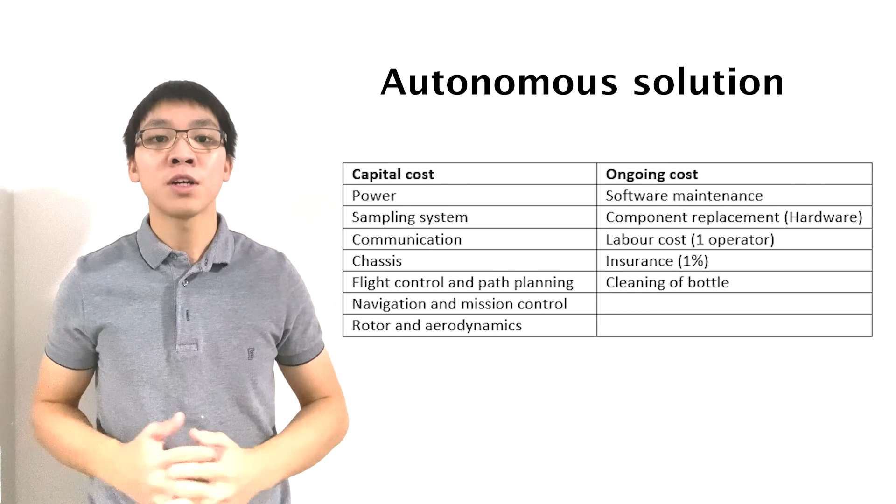The initial costs incurred for these components are mostly related to the programming of software to operate the drone. The ongoing costs incurred would mainly be for the system maintenance of software and component replacement of hardware. Besides, labor costs, insurance, and cleaning will also be taken into consideration. While the initial cost for the manual sampling method would be the cost of the sampling bottle only, the ongoing cost would be the cost of labor, insurance, cleaning, and boat hire.

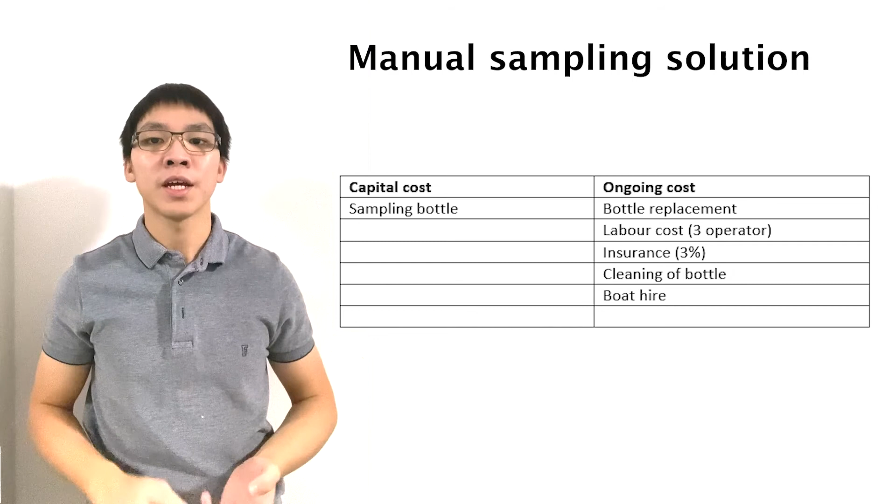An incremental cost analysis was also conducted to understand the total cost incurred to manufacture a second drone for future reference if a larger scale operation requires the use of more drones for simultaneous sampling in different locations. The cost of a second unit onwards would be 7,000 with the ongoing cost of 3,500. The significant reduction in cost for the subsequent drones comes from the software aspect whereby all drones manufactured can and will use the current software as the first.

As seen, the capital cost for the autonomous sampling method is extremely high. However, the savings on ongoing costs when compared to the manual sampling method would enable the operation to run for at least another 4 years. I would like to pass the remaining time to Henry to talk about the social and environmental impacts of this solution.

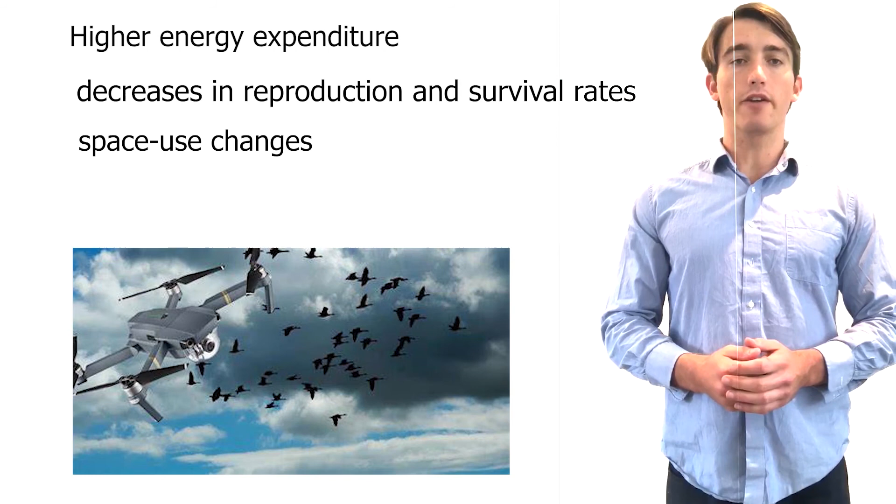A California study found that for package delivery, drones emitted 54% less greenhouse gases than trucks, with traditional sampling techniques in the developing world typically involving two-stroke powered boats. These emission savings are undoubtedly higher than 54%. However, researchers found drone activity can affect wildlife, with resulting physiological and behavioural stresses potentially leading to higher energy expenditure, decreases in reproduction and survival rates, and space use changes.

It is recommended a biodiversity analysis be conducted prior to sampling to identify large endangered birds of prey who are prone to fight or flight responses and attempt to mitigate potential harm. Appropriate actions following identification of unhealthy water systems promote long-term environmental health benefits that will see improved biodiversity, sanitation, water purity, and sedimentation, leading to significant decreases in the number of waterborne diseases that kill millions of animals and humans every year.

Water access improvements also reduce developing nations' reliance on aid packages and promote opportunities for women who are often responsible for collecting water, taking time away from work, school, and family, and thus assisting in the cycle of poverty. Implementation of a drone sampling program would also upskill the workforce and create a range of new jobs. Overall, the environmental and social benefits resulting from drone sampling far outweigh the potential detriment. I'll now pass you over to Aaron.

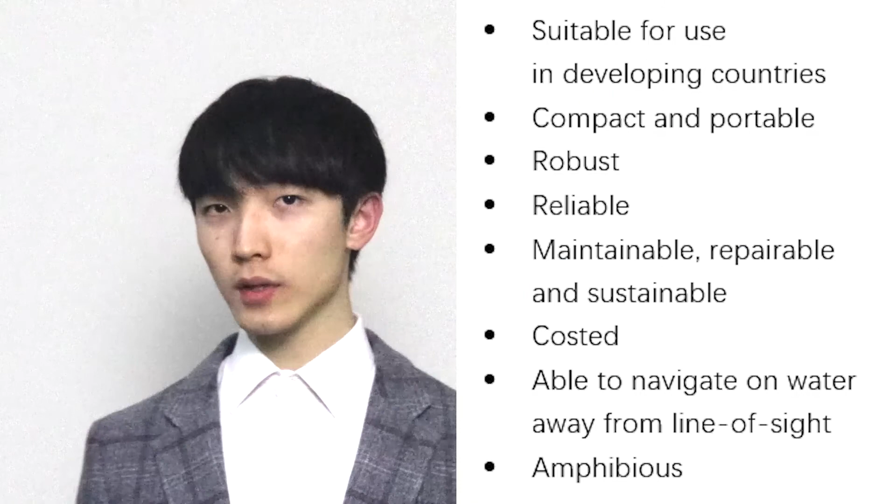Thank you, Henry. To summarize, Yamuna River in India was selected as a representative region for analysis throughout the project. After a comprehensive review of related literature, we decomposed the system into a mechanical system and an avionics system. Each subsystem was developed through a complete engineering design process, subject to the requirements and limitations set out by the user in developing countries. For our mechanical systems, we have developed a novel horizontal sampling mechanism, a hexagon rotor configuration with optimized propellers, and a lightweight chassis design that facilitates amphibious operation.

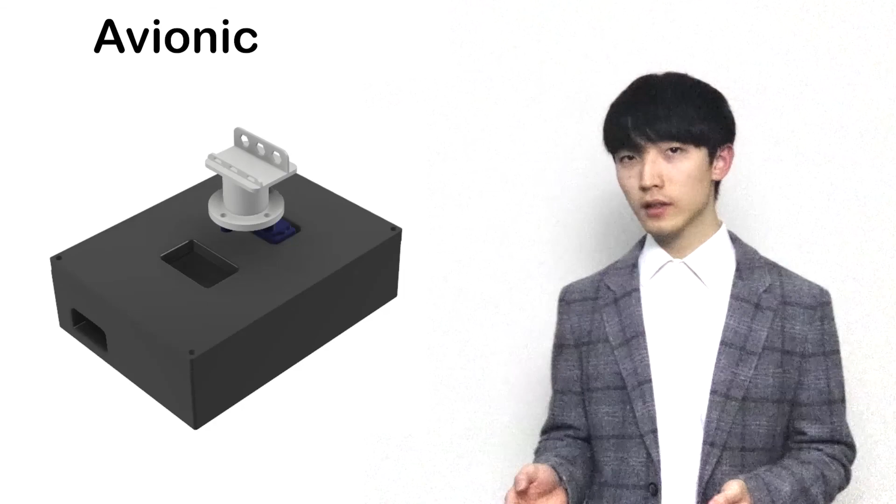For our avionics systems, we have integrated a flight set using Pixhawk 4, Raspberry Pi 4, and a radio remote controller. A complete autopilot using state-of-the-art vision-based navigation, finite state machine mission planning, and rapidly exploring random tree path planning was developed. In addition, we have also designed a learning-based prognostic algorithm and an antenna tracker to improve our power management and communication system.

The integrated solution has demonstrated promising capabilities in sampling water autonomously in Yamuna River, while requiring significantly less cost and being faster than most existing techniques. In conclusion, as a result of this project, we have successfully developed an autonomous water sampling UAV system that has a high potential in improving the water resource management in developing countries.